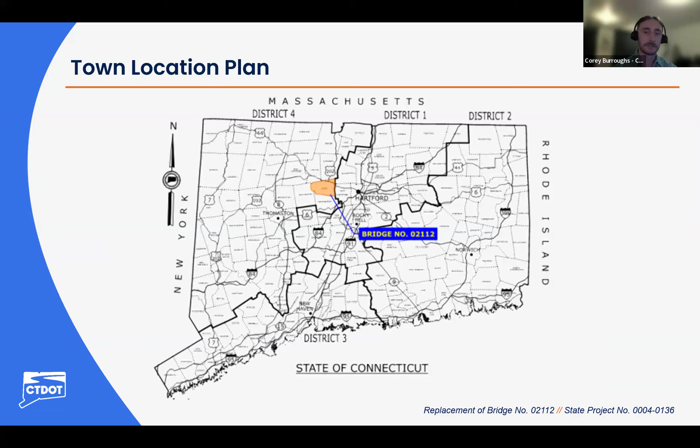Thank you, Corey. So again, my name is Kathleen Ericson, and I'm a project coordinator with the department's Division of Rights-of-Way. Our office is responsible for acquiring property rights that are needed for transportation projects all throughout the state. So as you'll see in this presentation, this project will require the acquisition of property rights. So I'd like to give you just a brief overview of what the acquisition process looks like.

Before I get further into that, though, I do want to mention that the specific property impacts for this project are still being finalized, and they may change as the design progresses. Also, any required property rights will be acquired in accordance with Connecticut General Statutes Sections 13A-73 and 13A-98E, as well as the Uniform Act. And next slide, please.

So the right-of-way acquisition process begins once the design has progressed to a development milestone and all of the impacts for the project have been determined. At that point, each affected property owner will receive from our office a formal letter of intent to acquire, along with a property map which depicts the exact property rights to be acquired. On the screen here, you can see a sample of what those property maps look like.

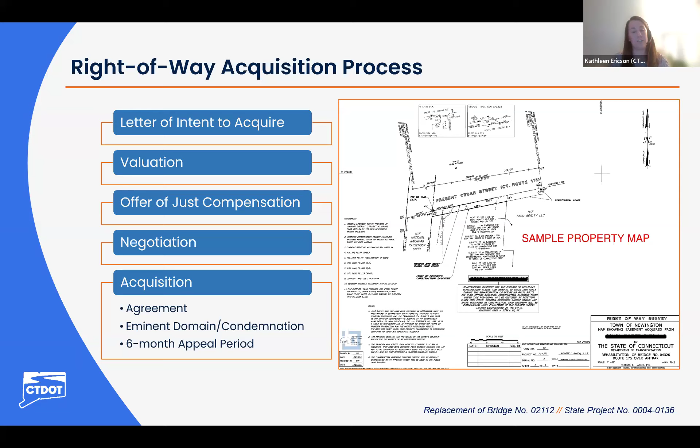Thank you, Kathleen. My name is John Wengell. I'm from CHA. I'm the project manager for the CLE on this program. I'd first like to start off with a quick overview of the project. The Bridge 02112 was built in 1927. It is an 8-foot single-span bridge consisting of a concrete slab on stone masonry, abutments, and wing wall. The current roadway width is 30 feet with an average daily traffic of 15,000 vehicles per day.

The project purpose is to address the structural deficiencies of State Bridge number 02112, which carries Route 10 over an unnamed brook in the town of Avon, to accommodate safe travel for all facility users on the bridge and proper conveyance of the brook water below.

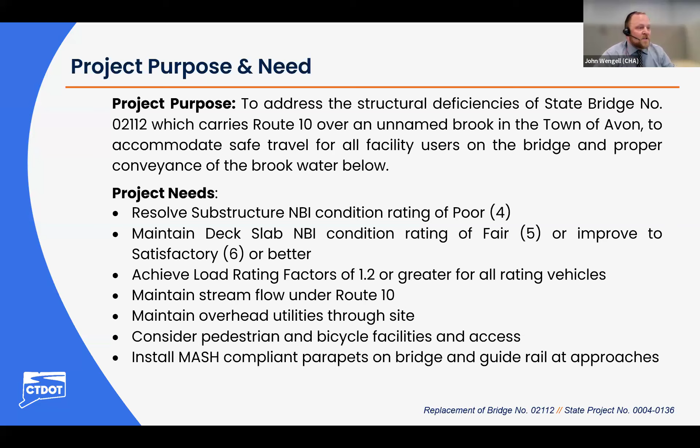Some of the project needs are to resolve the substructure NBI rating of 4, which is poor condition, maintain a deck slab NBI condition rating of fair, or to improve to a satisfactory level 6 or better, to achieve load rating factors of 1.2 or greater for all rating vehicles, to maintain the stream flow under Route 10. Also to maintain overhead utilities throughout the site and during construction, to consider pedestrian and bicycle facilities and access, and to install MASH-compliant parapets on the bridge and guide rail at the approaches.

The National Bridge Inventory NBI rating scale can be seen to the right and ranges from 9, which is excellent condition, to 0, which is a failed condition. Our project need is to raise the NBI rating to a 6, or a satisfactory rating, or greater for all our condition-related items. The condition rating is a judgment of a component's condition compared to the original as-built condition, which is also used to provide an overall characterization of the general condition of the component being rated.

Now I'd like to hand the presentation over to Mark Habek, the project manager from Benesch Consulting.

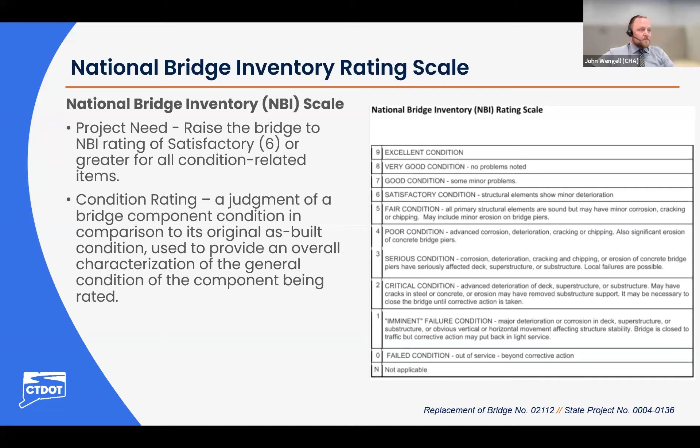Thanks, John. We'll start by looking at the existing conditions of the superstructure for the bridge. Shown here are some photos of the concrete upstream rail base, the underside of the bridge deck, and the downstream fascia. As you can see, there are deteriorations here, spalls to the concrete with existing rebar shown. These deteriorations to the bridge structure contribute to a rating for both the deck and the superstructure of a 5, or in fair condition.

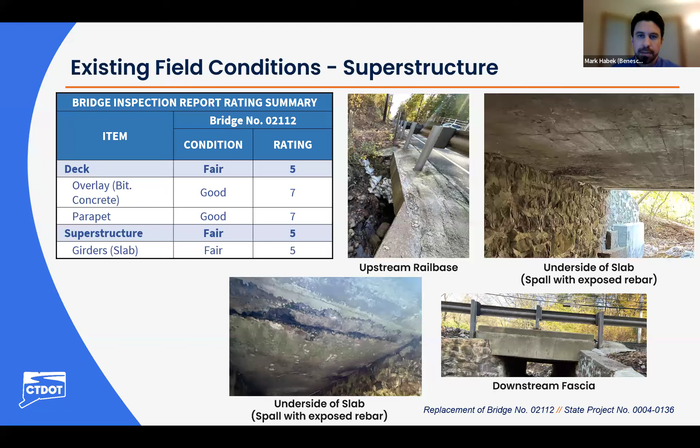Getting into the proposed plans, this is the proposed roadway plan for the project. As you can see, the proposed bridge is shown in orange. The stream or watercourse is shown in light blue, and the proposed full-depth construction for the roadway portion of the project is shown in yellow. The green shaded areas are the proposed grading, which will be required for the widening of the roadway, which I will get into in a few slides when we look at the proposed roadway section.

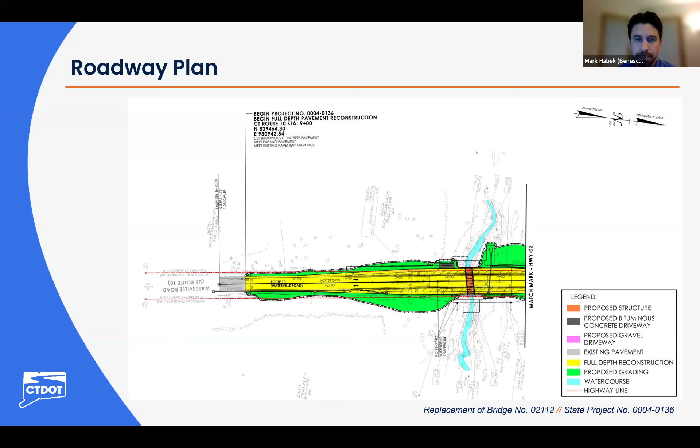This is the remainder of the project limits. This is the northern side, just to the north of the bridge. Again, you can see the full depth reconstruction shown in yellow for the roadway and the proposed grading shown in green. Proposed work to the bituminous concrete driveways in the area is shown in dark gray.

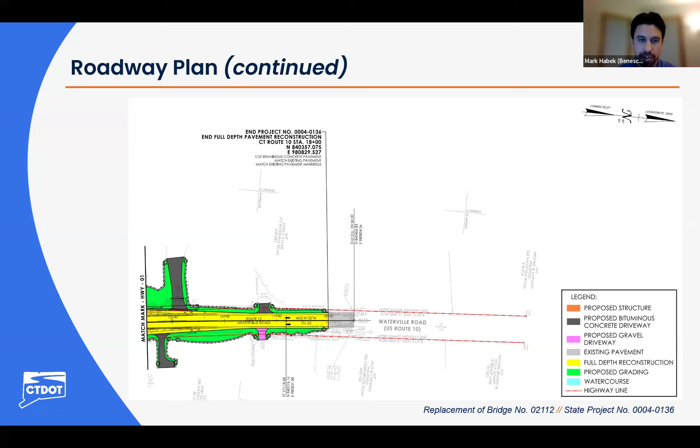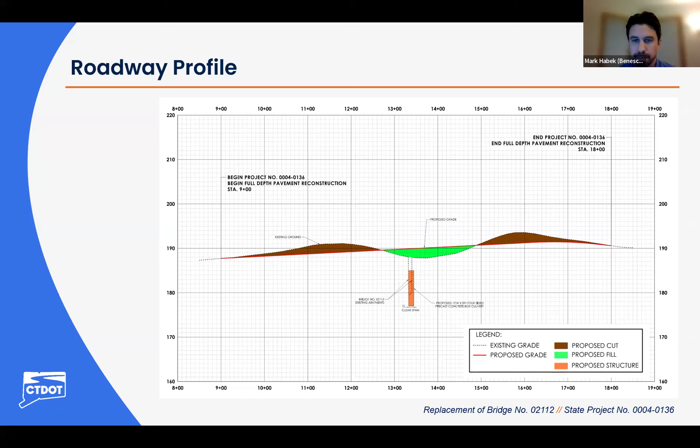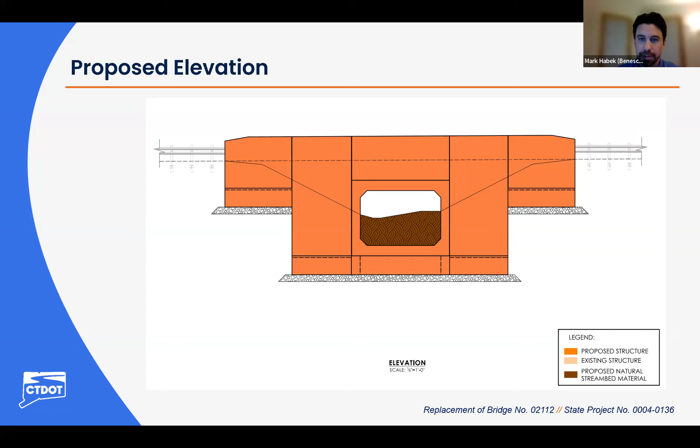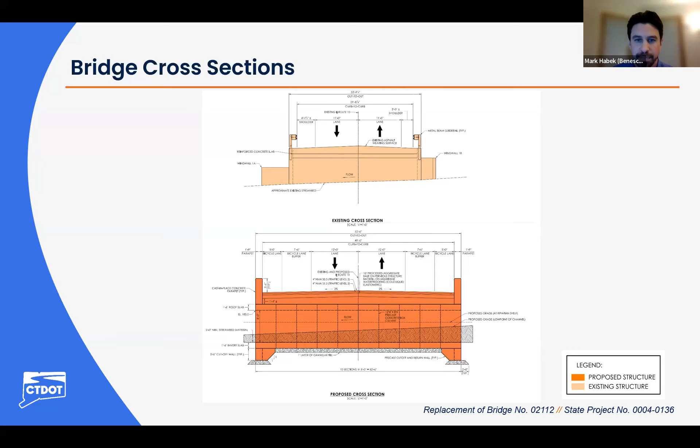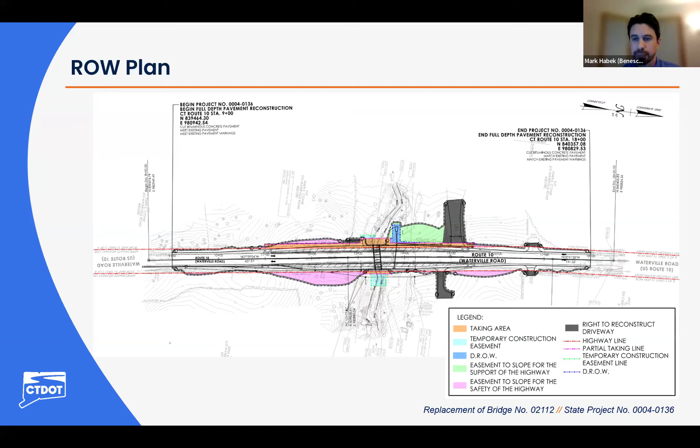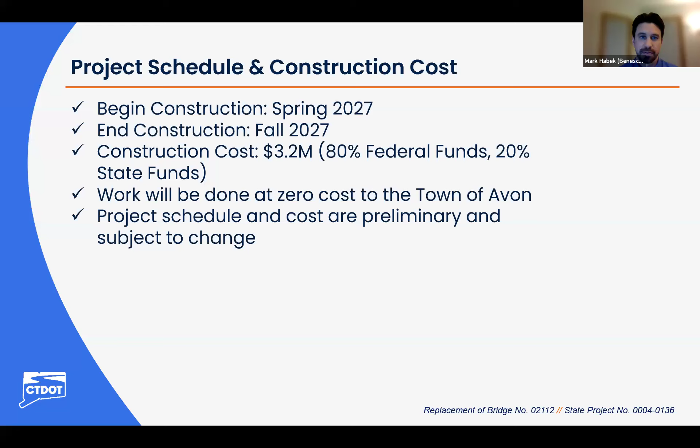Thank you, Mark. This concludes the presentation for tonight's meeting. We will now open up to the open forum portion for your comments and questions.

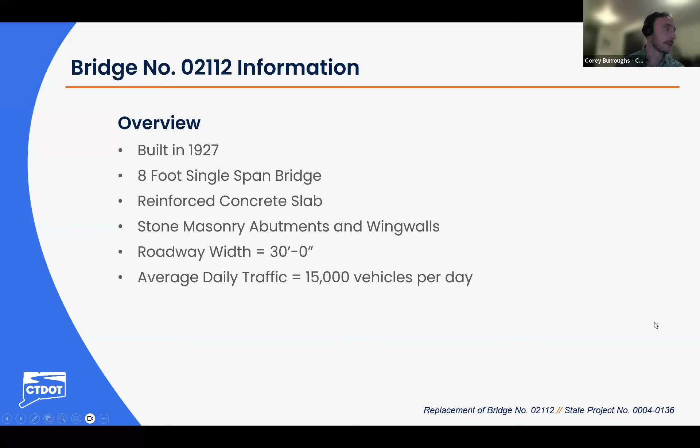We have a question from L. Kenny. Can you please show again where exactly on Route 10 this is? Sure. Can you go back to the map? So this is located between Talcott Road and... John, what's the road to the north here? It's Avon Old Farms Road, right by the Fisher Meadows Recreational Area.

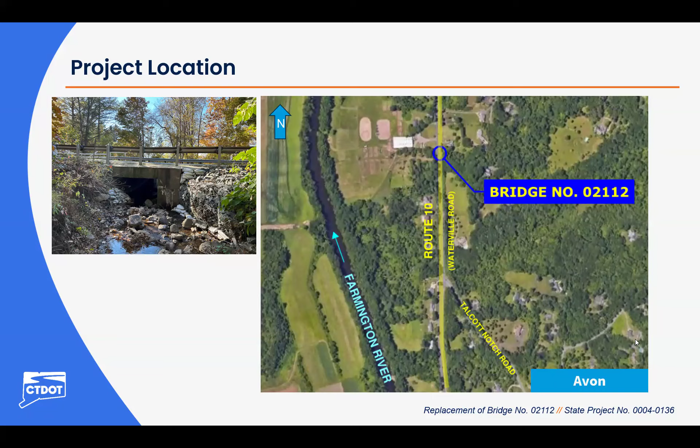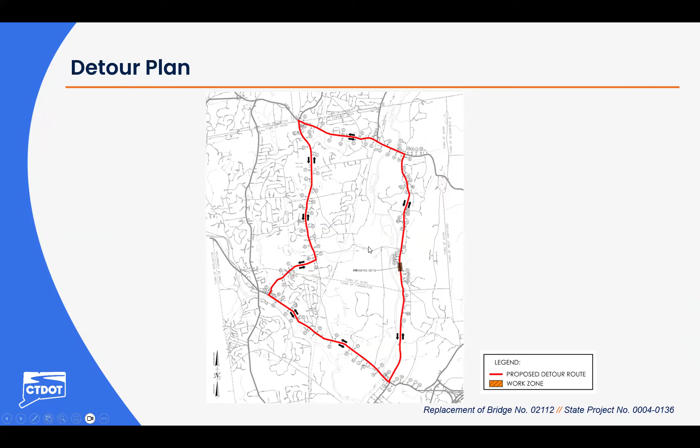And I can also then bring up the detour map again. The equestrian facility too. Yep. Avon Show Stables is right here, adjacent to the bridge, directly adjacent. I'll go down to the detour map so they can have a larger view of where this is. The project is located just south of Old Farms Road and just north of Talcott Notch Road. Thank you, John. You're welcome.

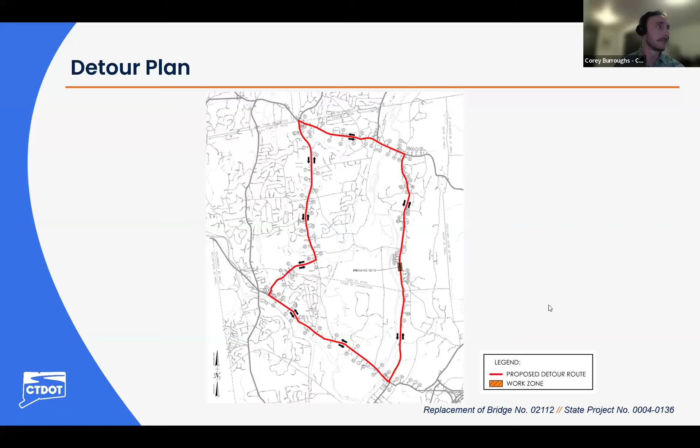As a reminder, you can enter questions into the Zoom Q&A window. You can also submit a question by email using the following email address, dotproject004-0136@ct.gov, or you can call 860-594-2020 and leave a voicemail, and the project team will get a hold of you as soon as we can. Also know that if you think of something after this meeting, the comment period is open until April 14th.

L. Kenny, why is the road being widened in addition to the bridge work? John, do you want to answer this one? Sure, yes, Corey. The bridge is being widened for two reasons. One reason being the condition of the existing stone masonry abutments don't really allow for traffic to safely be passed over. So we're slightly widening the bridge to the west to accommodate staging of the work.